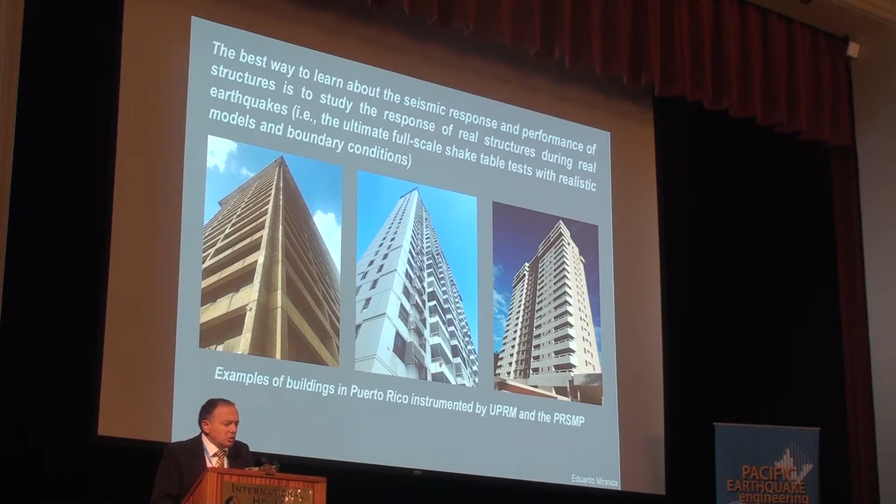So it's really this kind of thing that I've been doing for a number of years, learning and trying to create what I refer to as data motion pairs that allow us to improve what we do in design. There are a lot of earthquakes, but our learning opportunities are very limited if we don't have instrumentation. So it's really instrumented buildings, instrumented structures, and ground motion stations that allow us to maximize that learning. That's why I've been involved in committees, trying to push for instrumentation and then doing more with it.

So in terms of getting into this area, I tell students that we learn and do research by posing ourselves some questions, and this is a sample of the kind of questions that I pose myself related to damping. The idea is to see if seismic instrumentation and instrumented structures will allow us to answer at least some of these questions the best possible. So I'll go very fast. I don't have a lot of time, but I'll tell you a little bit about what we've learned over the years in this respect.

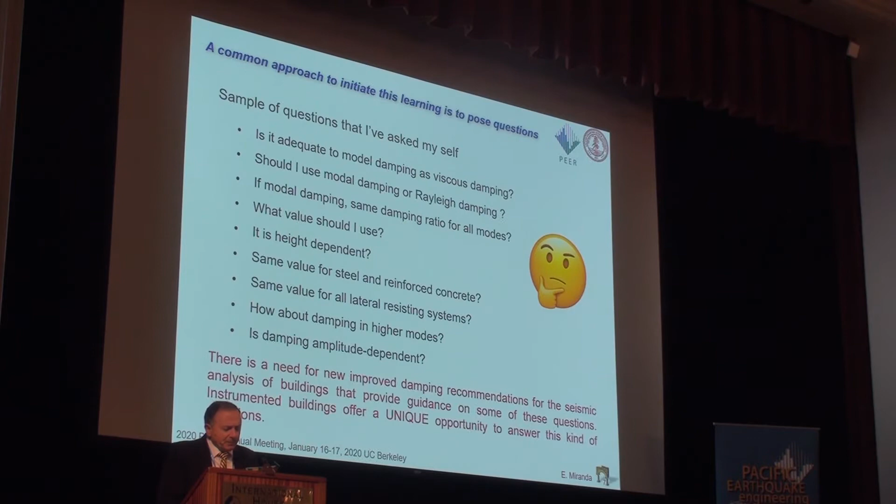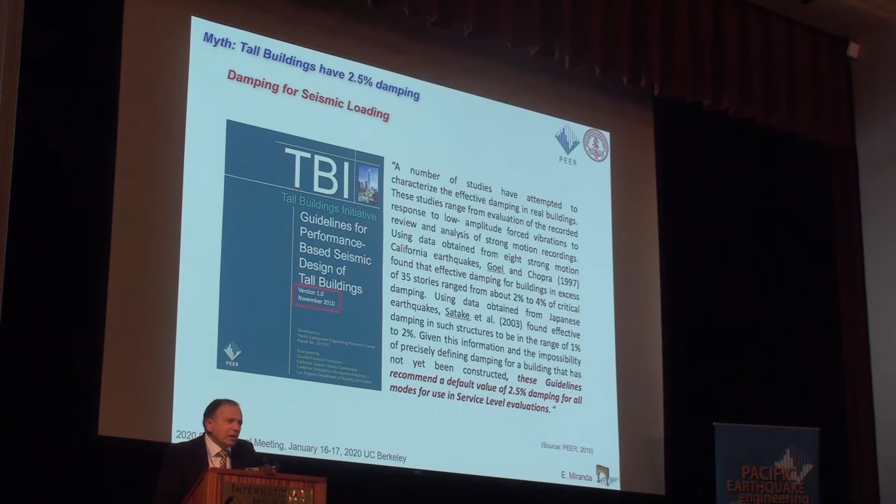And if you actually go into the literature, and I encourage you to do that, to keep track of where the 5% came from, you will see that it's a very interesting myth. So obviously, don't believe me, just think about why the energy dissipation mechanisms in one of these buildings would be different whether you shake it at the base or you push it with wind. And we're finding that there's a lot more similarities with the wind community. So in the first generation of the TBI PEER guidelines for tall buildings, for example, we would recommend a value of 2.5%. And even with stuff that I had done like 12 or 15 years ago, I said, you know, I don't think that 2.5% is correct.

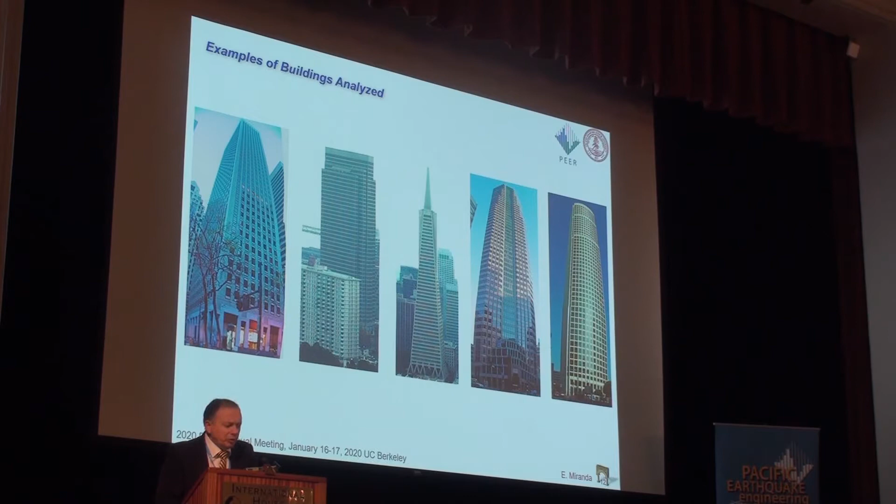And these are some of the older studies that had looked at some of these high-rise buildings here in San Francisco and some in Los Angeles, trying to learn about how they move during earthquakes. These are some examples of the instrumentation.

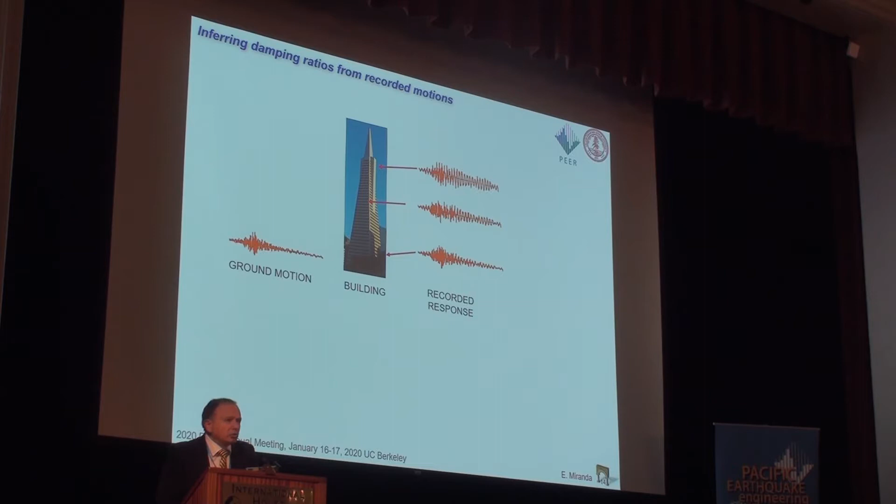I won't go into the details, but basically what we do is system identification, and we have our structure. This is sort of like the cover of Professor Chopra's book. We get a ground motion, we record some motions at different levels, and then we try to come up with simplified models that will try to reproduce the recorded response to learn about some of these dynamic properties of the building. So we're using time domain parametric system identification, which is essentially an optimization function, trying to minimize the difference between recorded and computed response.

But perhaps more interesting, this is just one example of a 52-story building in downtown Los Angeles, in which I'm comparing the recorded and computed response. And you can see that you can match it fairly well. You almost cannot distinguish one from the other.

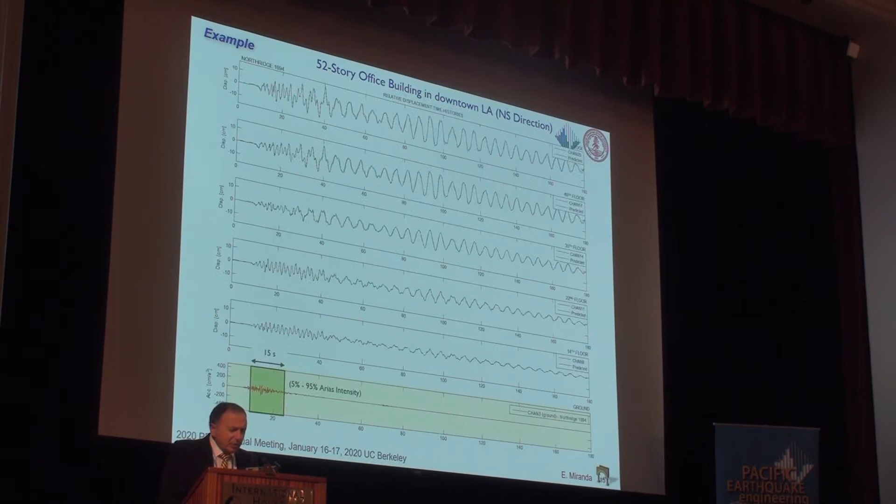But what is interesting about these high-rise buildings: there you see the ground motion at the bottom, and look at how short the duration of motion is, and that's Northridge, and then just look at all the movement that is going on in the different levels of the building, and they go on for a long time. Actually here I'm only showing 3 minutes of record, whereas the significant duration for that record is only 15 seconds. And so we also compute accelerations along the height, floor spectra, and these kinds of things.

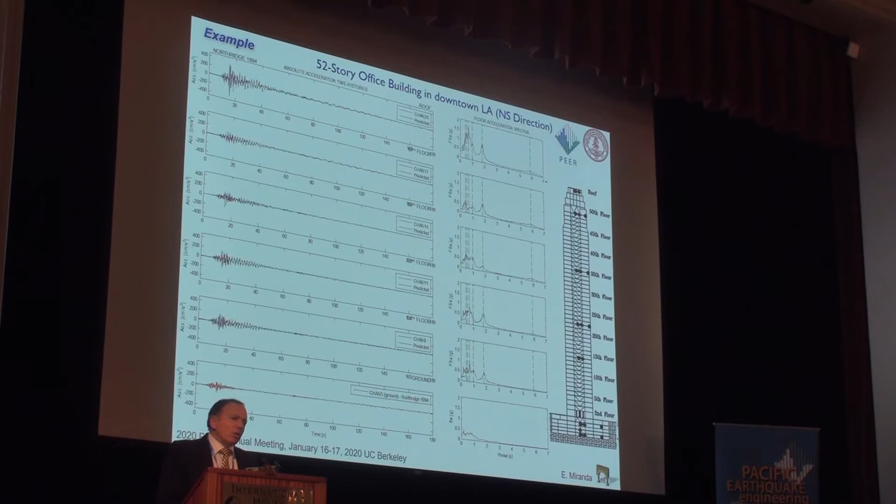And a lot of people in the literature, and I'm kind of an odd person in that I like to read a lot of really old papers, very commonly say, I would not like to overdamp higher modes because I may underestimate the response. But if you actually look at what is going on in the structures, we get more damping in these higher modes. And for this particular structure, in this particular earthquake, in this particular direction, it's about 1% for the first mode, and it was probably designed for 5%. So you wonder what level of response would happen, and in this case, even with respect to the first generation of TBI, it would be a fairly large difference.

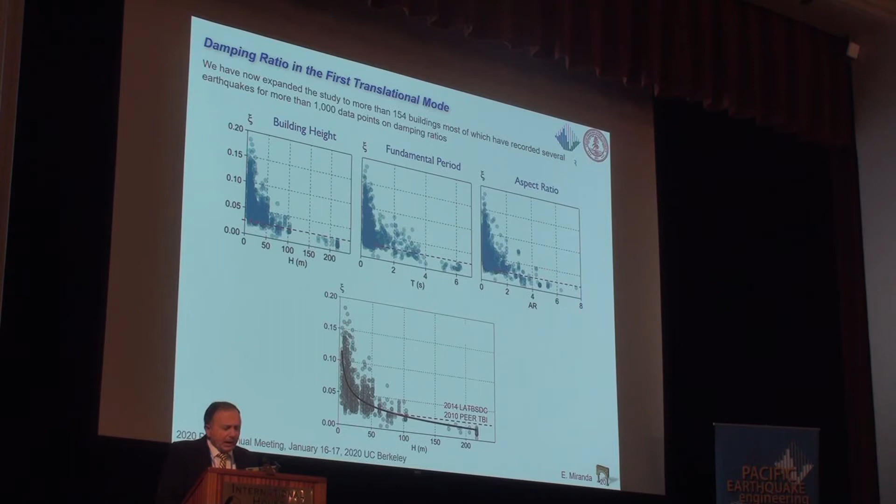And this is nothing really new. There are a number of studies, some of them as old as 50 years, mainly by Japanese investigators, pointing out that there was a big influence of the height of the building. And so we did some regression analysis and provided some recommendations to improve those guidelines.

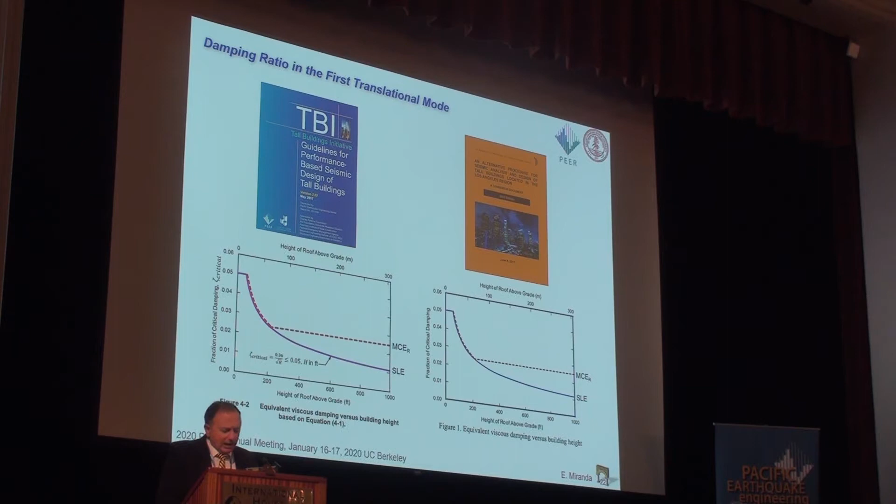And that has been incorporated now in the new PEER guidelines for San Francisco, and the same thing for Los Angeles. I'd like to say we're at least partially successful in convincing the different committees, but for the serviceability limit state for the MCE, there's still a height-independent 2.5% damping. Personally, I don't think that's correct, but maybe I just need to keep working on trying to convince my colleagues about that. This is just one example of how we've looked carefully at whether this is really viscous or not.

And we know that it's not truly viscous, but many other studies have shown that with viscous you can actually do a good study. And I don't have a lot of time to go into that, but one of the main reasons why viscous damping works so well is because I believe a lot of the soil structure interaction that takes place in these structures and through radiation damping, that's really what drives this.

And Professor Lysmer, a Danish professor here at Berkeley many years ago, wrote a famous paper on that you could replace sort of like an absorbing boundary by using viscous dashpots. So that explains very well what's going on.

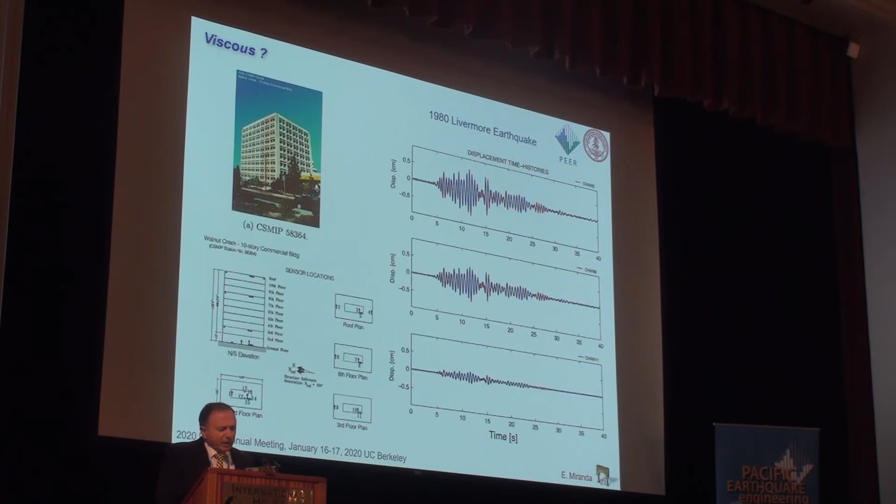And then we sort of extrapolated this amplitude dependence to much larger. So, the general thinking is that because earthquakes have much larger amplitudes than winds, then obviously we will get a lot more damping. But actually that extrapolation, we started to see how valid it is.

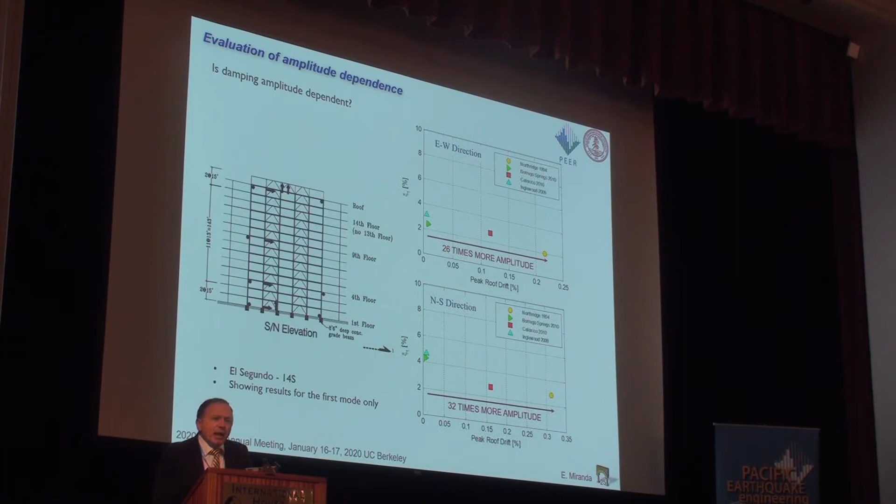So I'll just show you a few examples of this, but this is a particular building in Los Angeles where we have different earthquakes increasing the amplitude of motion 26 or 32 times, and we see about the same level of damping. And this is another example from that 52-story building, in this case in the order of 20 times more amplitude. And again, the damping is not changing very much.

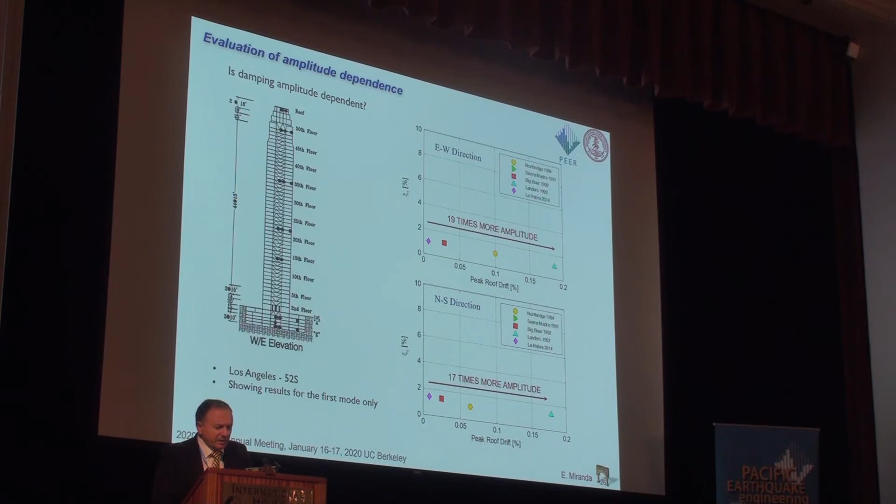These are others, and people like to say, well, that's really tiny level of motion and so on. I've done a lot of research on partition walls, and I know very well when they start cracking and all those things. And these are peak roof drift ratios. If you look at the peak interstory drift ratio, they're going way above the level in which you start having damage in facades and partition walls and so on. And still, you don't see a lot of increasing damping.

This is similar information that the wind community has done over the years, but now pushing it to much larger levels of deformation. And again, we don't see a lot of amplitude dependence. There is a tiny bit. And I wanted to show you a little bit what has happened. I've been doing this since I was in Mexico.

Mehmet Çelebi from the USGS had compared ambient vibration dampings with strong motion, and this is similar to what was done with periods after the 1971 San Fernando earthquake. We know that they're very different. But I wanted to ask, what goes on between an ambient vibration and a strong motion? So I started to look, thanks to the seismicity in Mexico, any little tiny earthquake and so on, trying to see what goes on in between.

And what we're finding, and colleagues in Chile, Rubén Boroschek, who's a good friend of mine, was my colleague here at Berkeley when we were doing our PhDs, he's observed the same thing in Chile in a number of buildings. And this is also similar to what several people in the wind community have reported. A lot of the change takes place when these buildings are starting just to move, but after that, they tend not to increase their damping a lot.

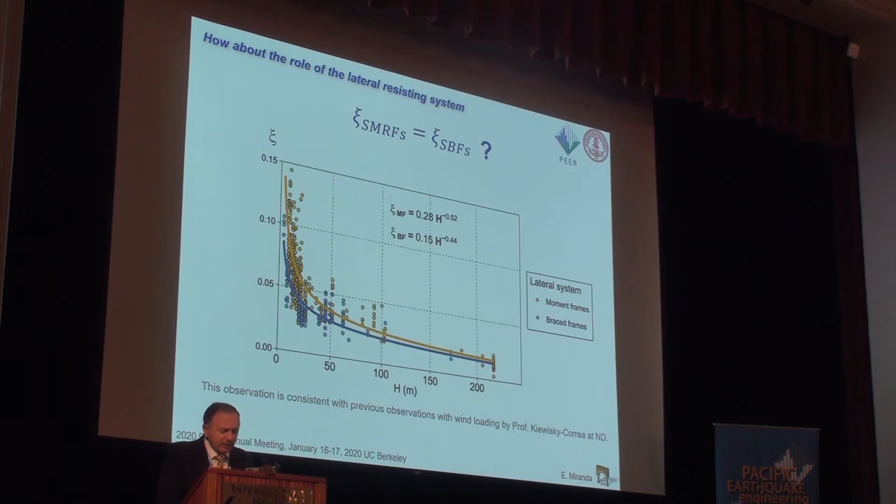wind loading. Then we also evaluated the Rayleigh damping, and I'm a big fan of John Strutt. I tell my students, but I don't know if they're following the advice, that you can download these books from Google Books and read them at night, and they're fascinating. The word damping didn't exist, so it was just dissipative forces he would describe, and how he described what we now know as Rayleigh damping.

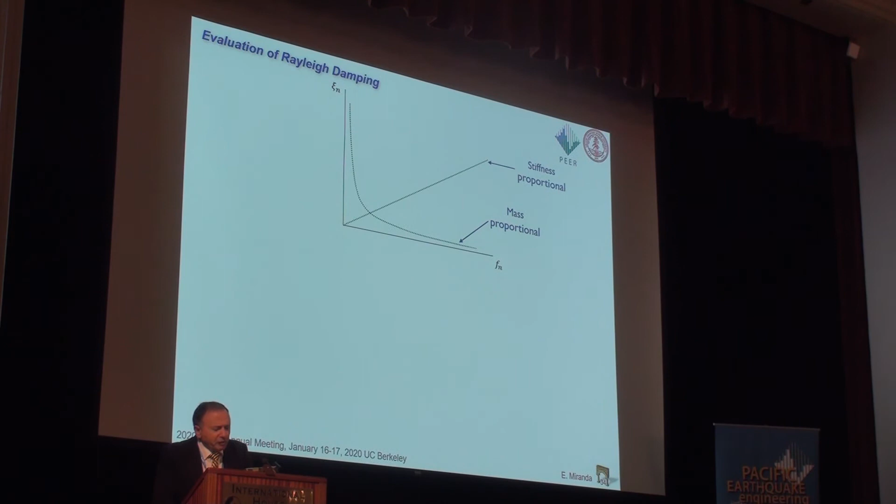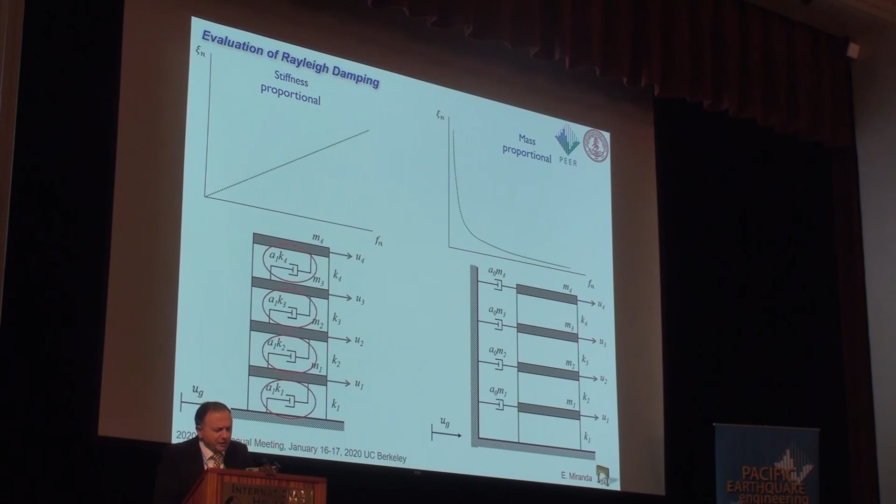It's fascinating. But I always thought it would be a huge coincidence if this great mathematical convenience of damping were to actually be true. So we've been looking into that, and this is an image that you may have seen in Professor Chopra's book, but it actually comes from a PhD thesis from what I would describe as the golden years of Caltech, into a physical interpretation of what Rayleigh damping is. And what did this tell us in terms of the variation of damping ratio with frequencies in these buildings? I'll show you one example.

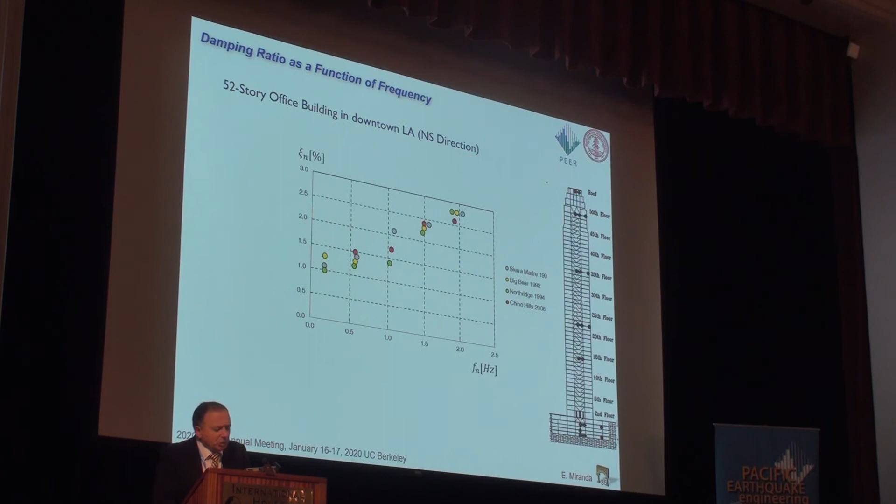This is in the Sierra Madre earthquake. It's a tiny earthquake near Los Angeles, and what I'm plotting on the vertical axis are damping ratios of the different modes, plotted against the frequency of each one of these modes. And then we do this in different earthquakes. We do have a little bit of earthquake to earthquake variability, but the trend is very clear of increasing damping ratio with increasing frequency.

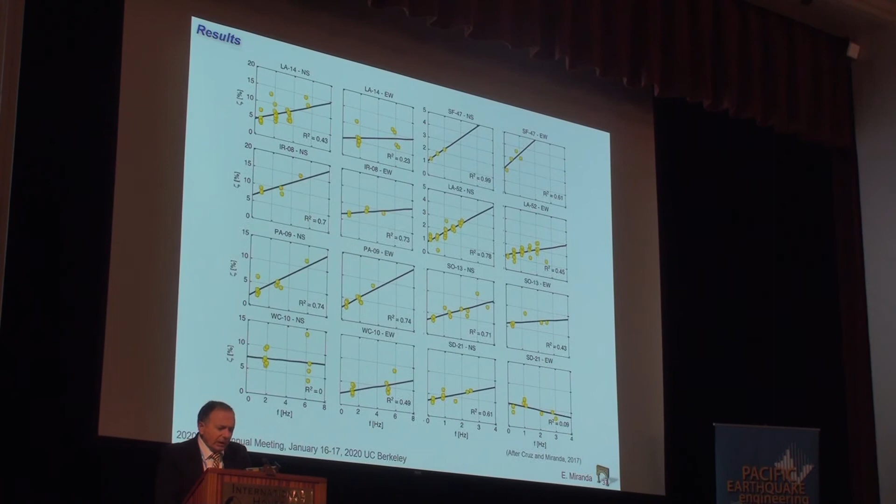So we've done some regression. I won't go into that. But I'll show you just very quickly lots of buildings where we've seen this. And other than 2 buildings, every other building in which we've been able to reliably identify damping in higher modes has higher damping ratios in higher modes.

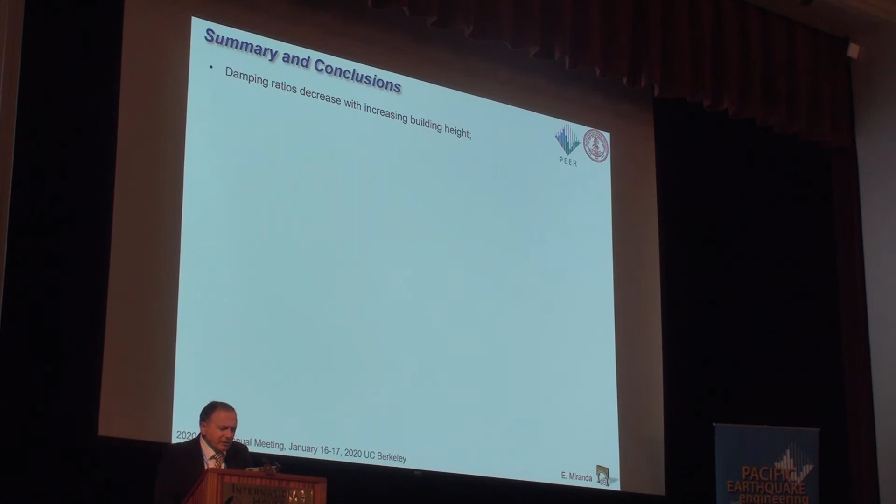So I'll just wrap up with some conclusions. Damping ratios decrease with increasing height. We've known this for 50 years. We just have not used it for seismic design, but thanks to these tall buildings performance-based guidelines, we will now start doing this. And then, as I mentioned, there are a lot of similarities of our results with those of the wind

community. And there is amplitude dependence, and it can actually be fairly important, but it occurs at really tiny levels of deformation, and beyond that, there doesn't appear to be a lot of it. Now, of course, once the structures start going nonlinear, if you actually model that nonlinearity with hysteretic damping, you wouldn't duplicate it by adding some large equivalent damping.

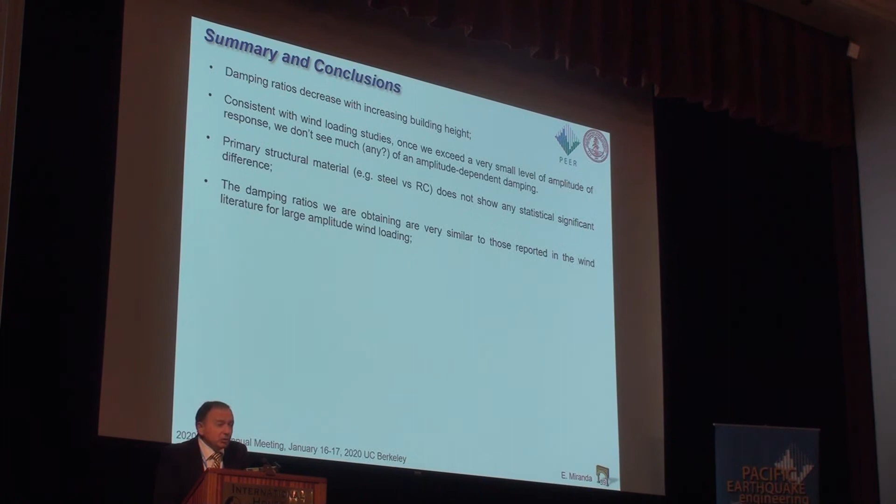As I mentioned, in terms of the material, we think that there's not a lot of difference between steel and concrete. There are some differences with lateral resisting systems, and those, I believe, have to do more with soil structure interaction. I didn't have a chance to go into that. But the other thing is that the damping ratios increase approximately linearly, so it's not exactly stiffness proportional, but you do have a linearly increasing damping with frequency.

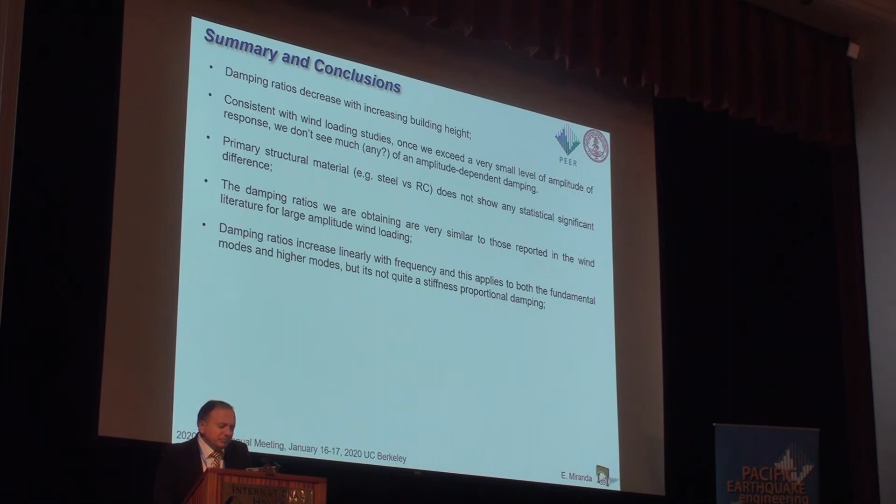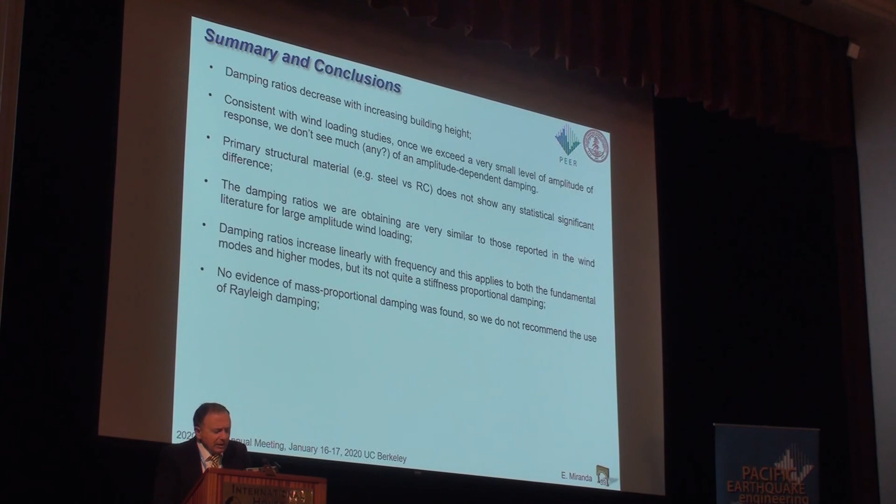And again, several people in the wind community had suggested that previously, so we're finding that, you know, it's the same building. Why would it be different if you move the base or you push it on the different facades? We didn't find any evidence of mass proportional damping, so we don't recommend using it, or you need to modify some things. And again, I didn't have a chance to go a lot into soil structure interaction, but I believe it's the major source of damping in these buildings.

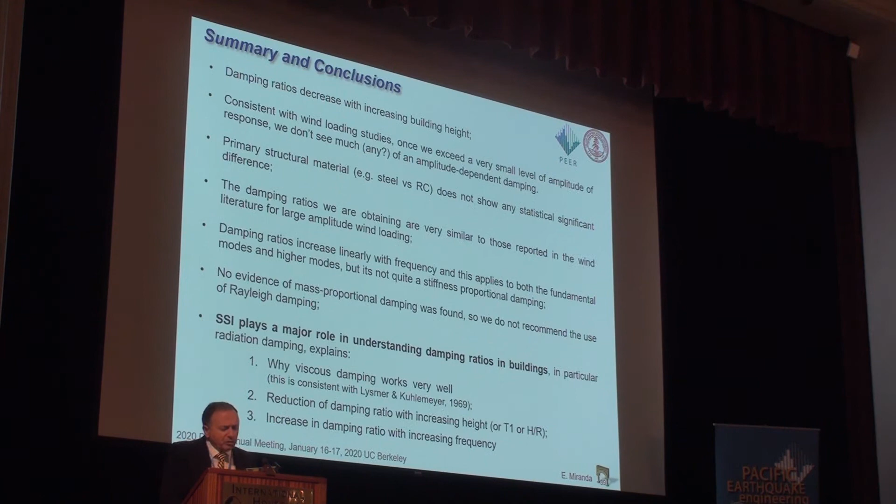And in particular, if you look with relatively simple models of SSI, like a uniform half space, you can actually explain why viscous damping works so well, which again, all boils down to UC Berkeley and Professor Lysmer. I was fortunate enough to have a class on soil dynamics with him, and whenever I'm working, I still hear his voice talking about the frequency domain. And the reduction in damping ratio is also consistent with soil structure interaction, the same as the increase in damping for the higher modes.